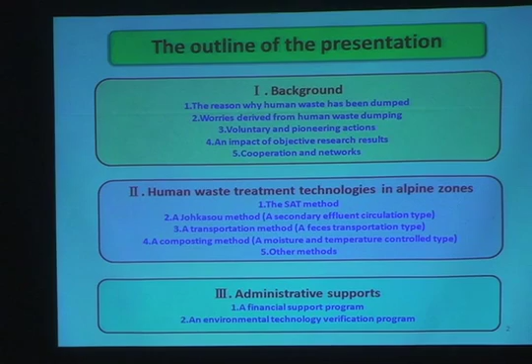This is the background of human waste issues in the Alpine area in Japan. In general, in city areas, we have three major human waste treatment methods. The first one is the sewage system, the second is Johkasou in Japanese, which is a clean tank, and the third one is transportation by vacuum. But those three major treatments could not be used in the mountain or Alpine area.

That's why human waste treatment technologies have not been developed in the mountain or Alpine area. So many mountain huts are dumping human waste. The oldest mountain hut in Nagano Prefecture has been dumping human waste for over 100 years.

So when you're dumping human waste, you're going to have problems with polluted water. But people did not focus on the issue until the middle of the 1900s. Human waste dumping problems were first reported in the 1970s.

Since then, people paid attention and voluntarily and pioneeringly made research. As a result, they found coli bacteria, or E. coli bacteria, existing in the river and fountain water.

And people recognized, through this objective research, many people started recognizing the necessity of human waste treatment. And a networking system to prevent dumping human waste also started.

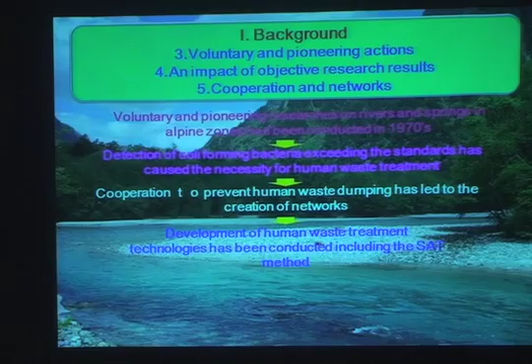And SAT, to be explained later, is one of the human waste treatment technologies. Next, I will try to explain the human waste treatment technologies, one of which is the SAT method. SAT means S for seeding, A for aeration, and T for trench.

Seeding means providing microbials into the raw or untreated human waste to decompose pollutants. Aeration means providing oxygen to promote aerobic microbials to decompose pollutants.

And trench means permeation — permeating in the soil after the secondary effluent is produced, it is permeated into the soil. The size is 50 centimeters in width and 60 centimeters in depth.

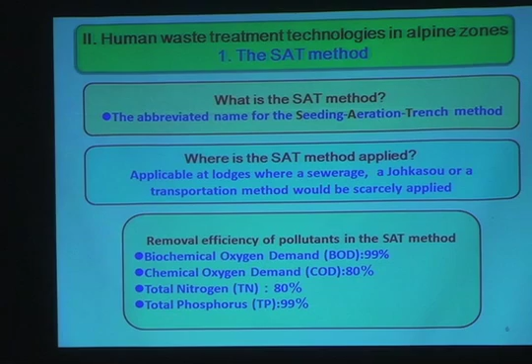Next, COD. COD means chemical oxygen demand — the volume of oxygen chemically demanded to decompose pollutants. Total nitrogen and phosphorus cause eutrophication in rivers and lakes.

This is the outline of the SAT method. The SAT method includes stages: the first one is aeration, and the second stage is soil penetration, a soil permeation system.

For the first stage, we use microbials, so-called Bacillus, for seeding and aeration. This is for the first time use, but for subsequent use, you can use secondary effluent as seeding material.

How much air is required for this process is about 8 times the air volume for wastewater, per hour. The first stage takes about 1 month.

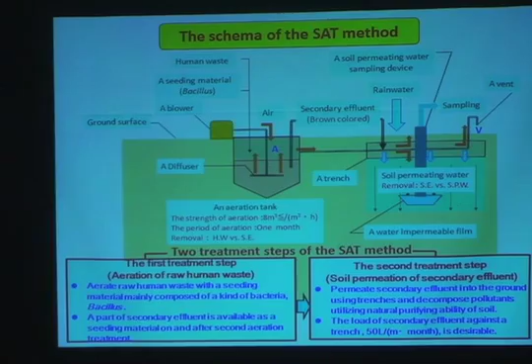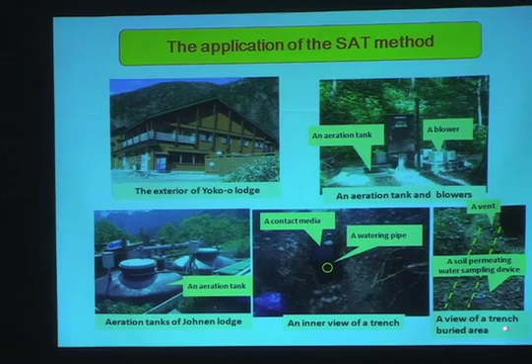At this mountain hut, about 20,000 people use this system a year. So you could see the vent, soil permeating water sampling device, and this is a view of the trench, the very under part.

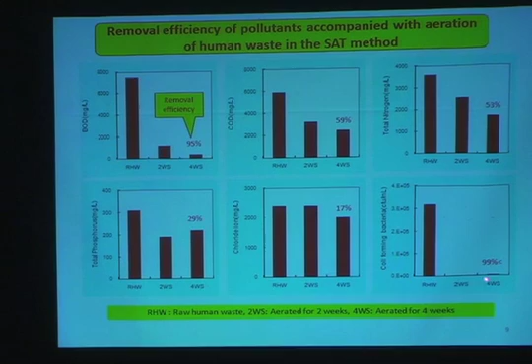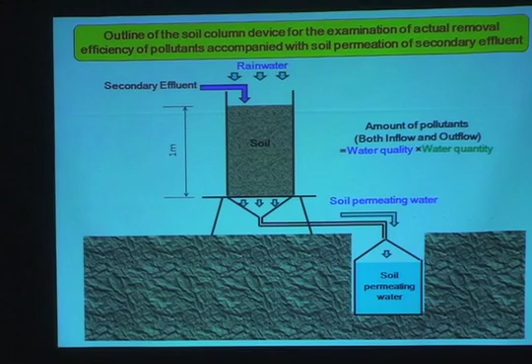So you need to get a more accurate number later. In order to get an accurate result, you need some adjustment for the rainwater. This is a system for how to adjust the rainwater using mass balance.

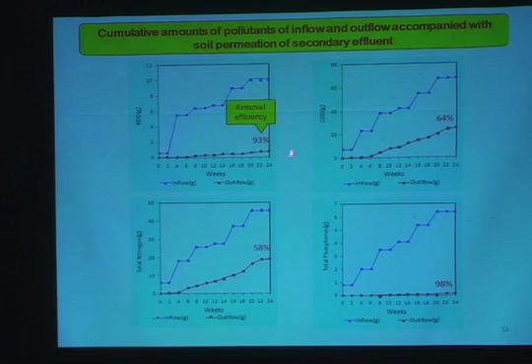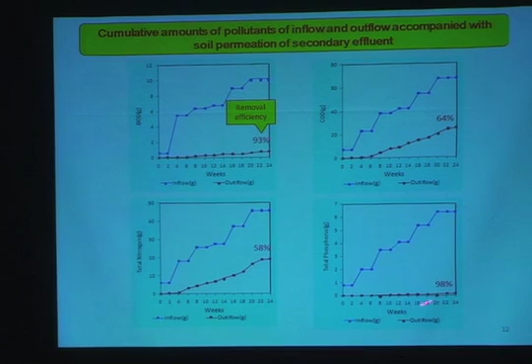Okay, these are also results of the secondary process, the soil permeation, but after the adjustment of the rainwater. You see BOD 93% removal, COD 64%, total nitrogen 58%, and total phosphorus 98%. So this is the actual result using the SAT method.

Through the first and second stage, also including adjustment, BOD removed 99%, COD 85%, total nitrogen 80%, and total phosphorus 99%. This is the final result actually used at the site.

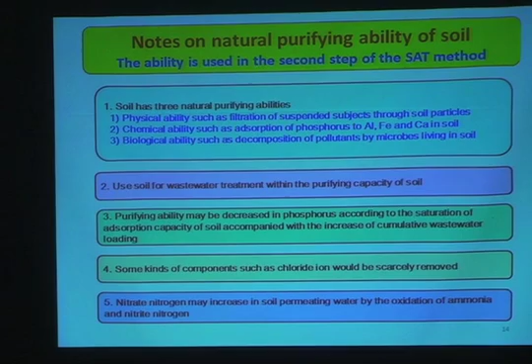A little bit more explanation about the secondary process, soil permeation. This technology uses physical, chemical, and biological processes. However, it's not completely treated. There is some certain limit to cleaning up all the elements.

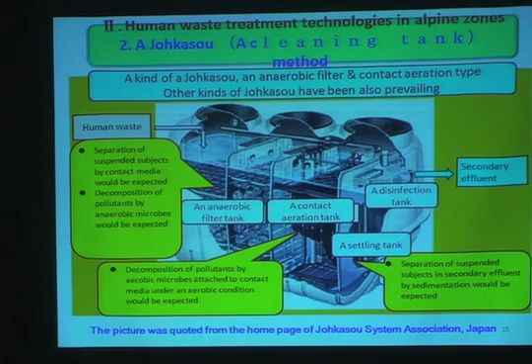So this system, the cleaning tank, is called Johkasou in Japanese, and is mainly used in the city area. It's not used in mountainous areas. This system has aeration and non-aeration cleaning stages. The main reason Johkasou cleaning tanks could not be used in mountain huts or Alpine areas is they need a lot of water.

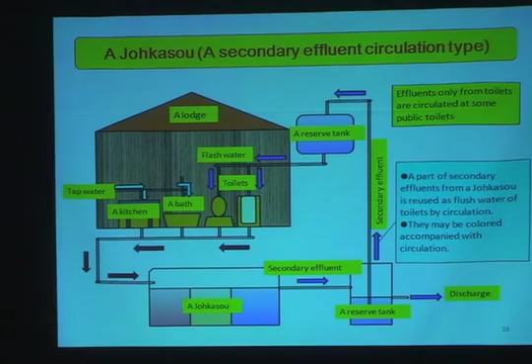But this system improved. They can use rainwater, and this system can be used at mountain huts. So the water is recycling, but the water gets dark, including non-biological things in the water, which makes it dark, but it's still usable for this circulating system.

So this is one example, transported by helicopter. This is the toilet area, and the point is that they separate feces and urine through this tool, and the feces tank is here. In order to save transportation cost by chopper, they only transport the feces, and the urine goes through the Johkasou cleaning tank and is disposed of.

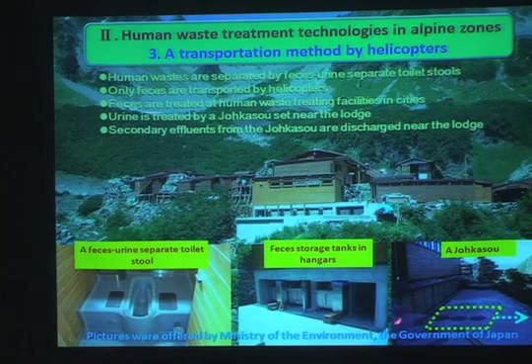Also, another factor is the temperature. The temperature control is also important.

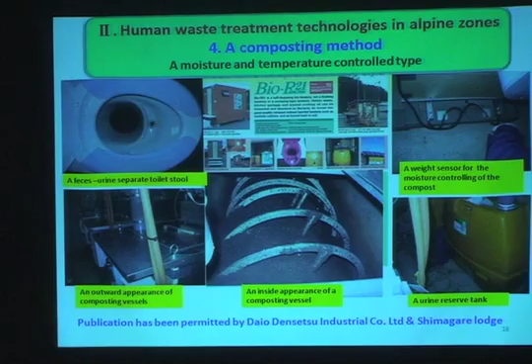So if you have more technical questions, please come to our booth, and we are very happy to explain. So there are other technologies to clean the human waste water, like these. The reason is that each circumstance and condition is different, so we use a variety of technologies in Japan.

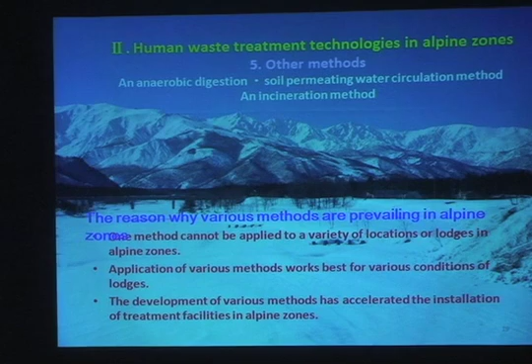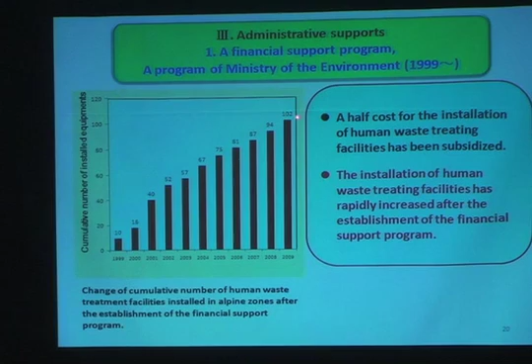And the third subject is about Japanese government support. You see this program started in 1999. So in 2009, about 102 facilities were installed under the Japanese government support program.

About Mount Fuji, we have 42 mountain huts. So all the human waste treatment systems have been installed by the end of 2006.

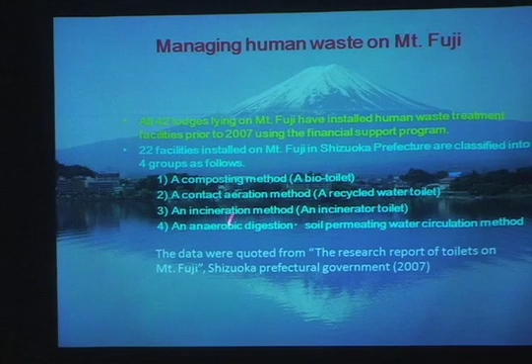These technologies are installed in Shizuoka Prefecture. Mount Fuji is located in two prefectures, Shizuoka Prefecture and Yamanashi Prefecture. So these are data showing 22 mountain huts in Shizuoka Prefecture installed these technologies by 2006.

So there are two supports under the Japanese government programs. The first one is financial support, and the second is technical support, which is an environmental technology verification system. By 2009, 17 facilities were verified by the Japanese government. You could get such information through the website, but it's in Japanese.

So these are a summary of my presentation. The human waste treatment issue is still in process, developing in Japan. But over the last 40 years, we have done a lot of improvement and installed human waste treatment systems. Through this international conference, I'm very happy to contribute our study or assistance to the people. Thank you very much for paying attention to my presentation.